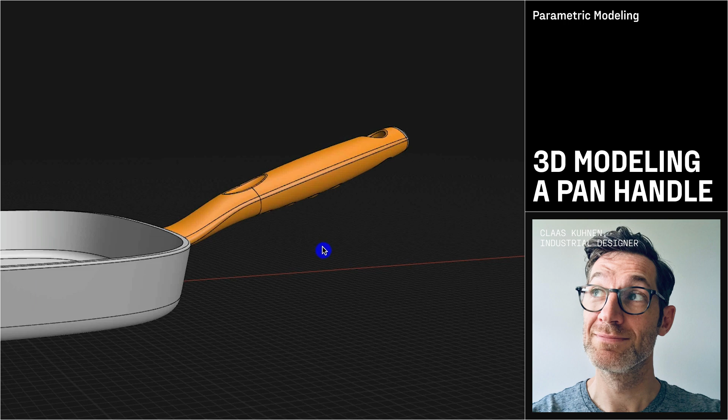Hello everybody and welcome to this tutorial in which I'm going to show you how with Shapr3D we can create this nice looking frying pan handle and attach it to an existing frying pan. We will go over the creation of the individual sketches and then the bodies.

We will touch the history, how we can design and modify our handle styling, and then we will finish everything with a nice product presentation inside the visualization mode. And with all that said, let's get going.

Here's actually now our raw demo file. As you can see, we have an existing basic frying pan model already inside our design.

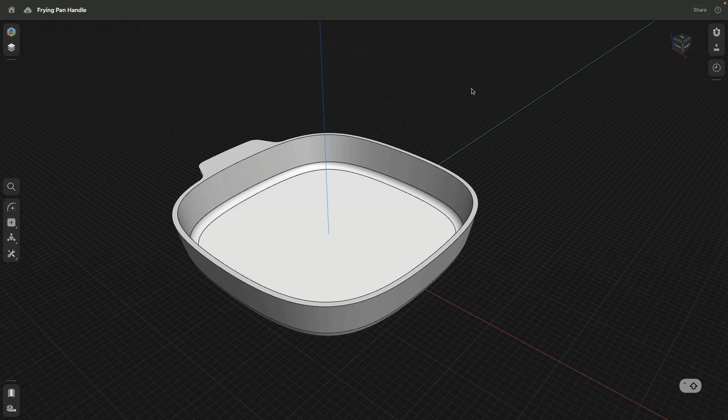All the snapping options are turned on and we are in millimeters. The easiest way now to start designing our handle is first thinking about where is the handle going to be attached to the frying pan, and then from there we grow the handle out. To do this, first I will add a construction plane. And I will offset this plane by 110 millimeters.

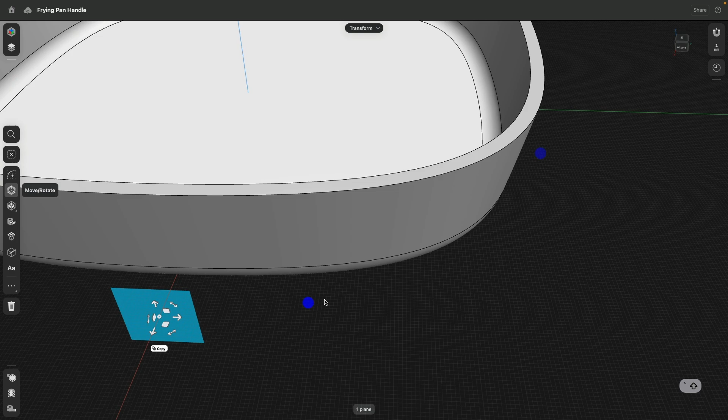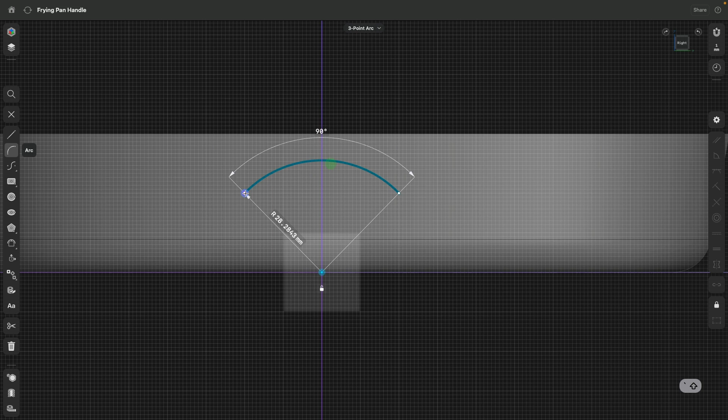This is actually very useful because now, right where this construction plane is, I can create a new sketch. In general, I always create very clean geometry, so no details such as fillets. All that, like fillets, I will add later. So with the arc command, I will create an arc here. I will create an arc at the bottom.

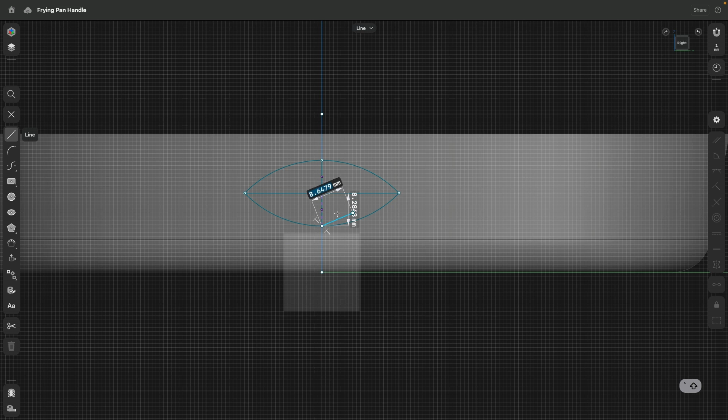Then, because I need tools to also control where the arc is and the dimensions, I create a horizontal line, escape. I create a top line, escape. I create a bottom line and I press escape. And one more time escape. Now these three lines I can select, turn into construction lines, because they're just guidelines, and make sure they're horizontally and vertically oriented.

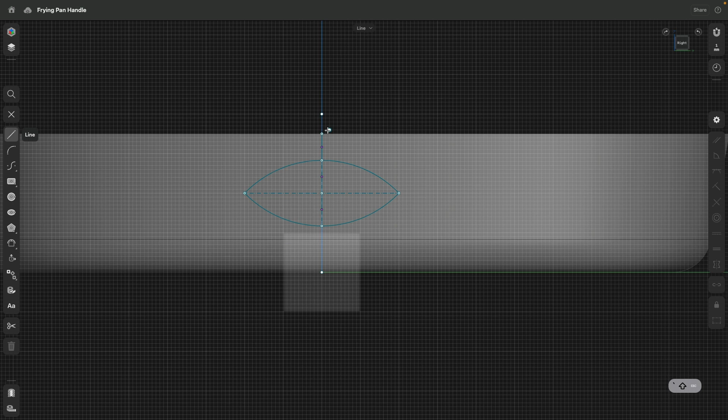Another line on top, and escape, and escape. And the top point I lock, and then this line here again, I make a construction. Because this now gives me the possibility to very precisely position the height of this arc.

The width of this resulting body I set to 40 millimeters, and then the height I will set to 10 millimeters. But you see the two ellipses are very uneven. But when I select both arcs, we can set them to equal. And now they're perfect. Very good.

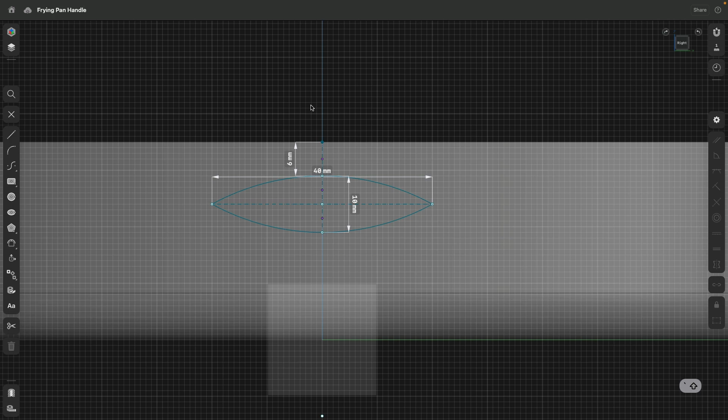Then if I zoom out, exit the sketch, I can now select the filling of the sketch. So you see the dashed construction lines don't interfere with our modeling, and I can extrude something in or out and cut it into the body. So you have to be careful where you move the mouse to.

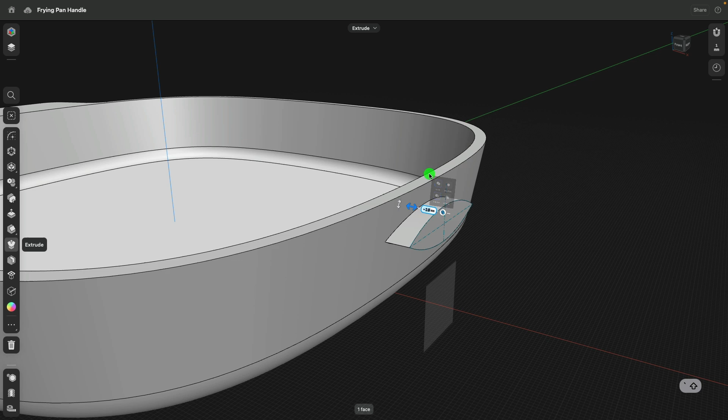And here in this case, I don't want to cut. I want to actually fuse it right into it. So I select the union command. And there you see, we only have one frying pan. Perfect. Here, I will put the two pieces into a folder so I can hide it. There we are.

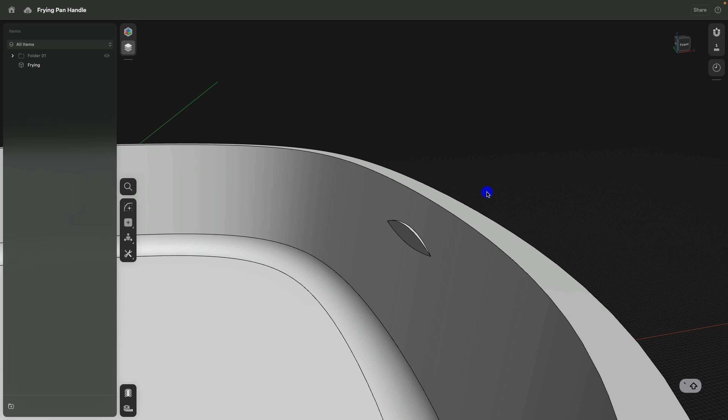In my case, as you can see here, I worked a little bit dirty, which is not really a big problem. Look at this. I simply go ahead and adjust the design. So -8 millimeters. There, perfect.

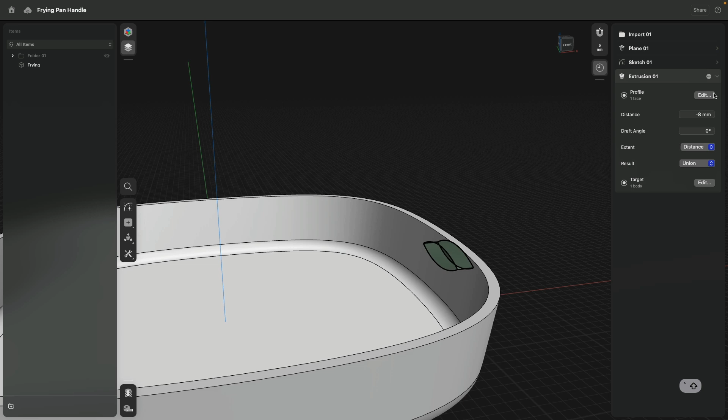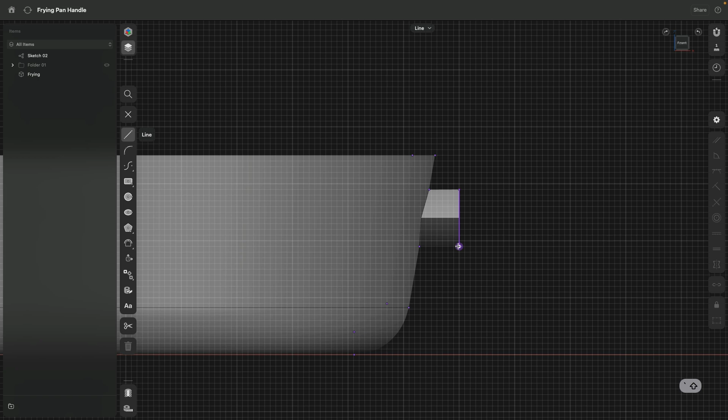Now we can think about how we do the handle. Because I have this body, I have a midpoint. I will go to the front view. I will create a new sketch. You see there now I have two plane intersections, so where the geometry intersects with the sketch, and I can just draw a vertical line between these 2 points.

And there's my midpoint. From there, I draw a line out, 175 millimeters. And click. Very good. And escape. And then I draw another line out. There and there. And escape. This line and this line, both will be horizontally, vertically aligned. And the angle between these 2 lines is 18 degrees.

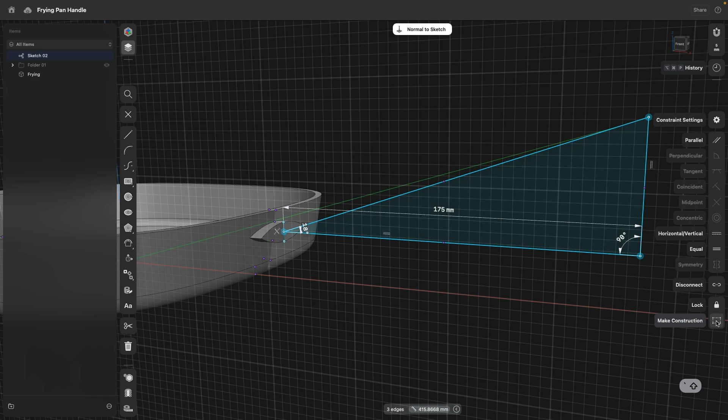And actually everything is just a construction, an underlay, if we want to think about it this way. So let's select them, make them a construction type. Perfect. Because now I have basically the point where the handle will start. Here we will have our curve, and then we will have the transition into the base.

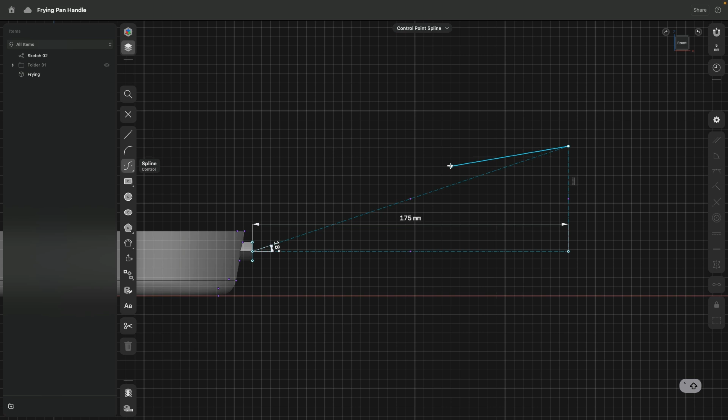Very nice. So we can now go ahead in the sketch to add our spline. I will use the control point version, and from there I will click and go over and click, and I press escape. The distance between these 2 points I would like to be 120.

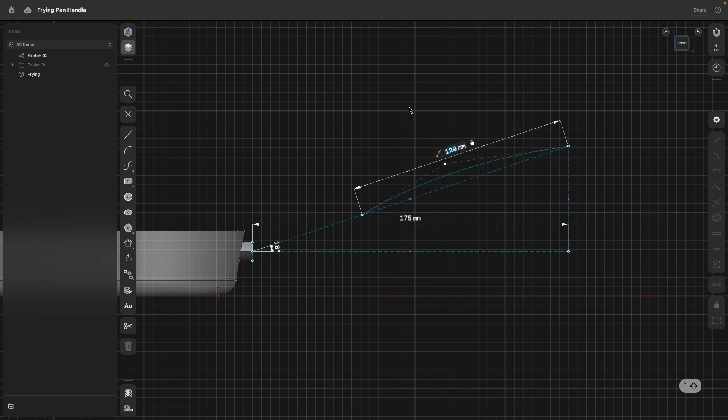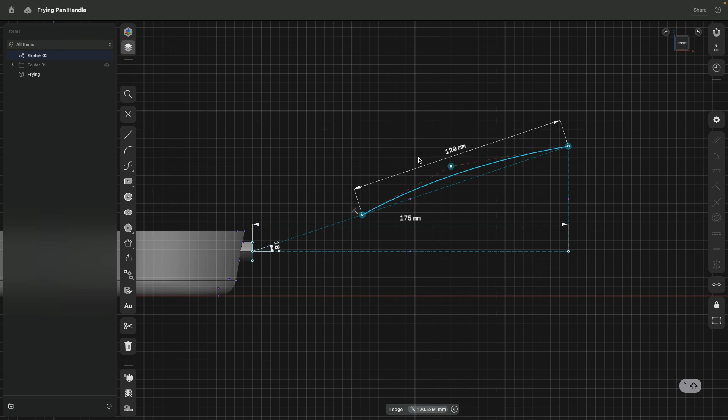There we are. And then this point I can move around, and with this you see we're arcing basically this handle quite nicely. Very good. So along this spline we are sweeping actually 3 profiles. And we'll do pretty much the same construction like we did for this shape.

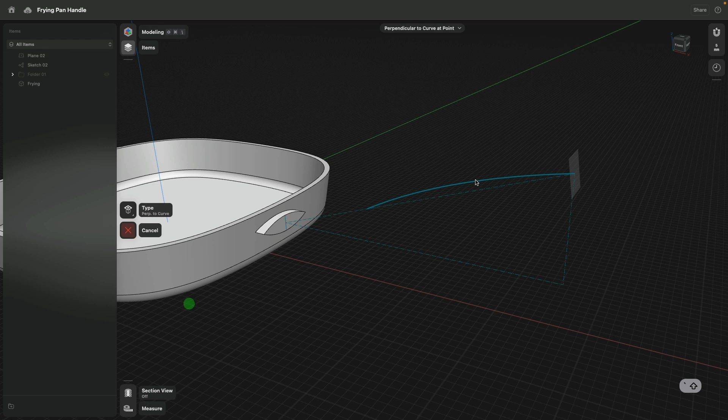So what we will do, we exit the sketch, then we go to add and construction plane. The type will be perpendicular to curve. Click on this one. Okay, at the beginning, that's fine. Then we do the same. This has now to be somewhat at the center, but a little bit further. Okay. And then we do one last at the end. And click and drag this to the end. Perfect. And done.

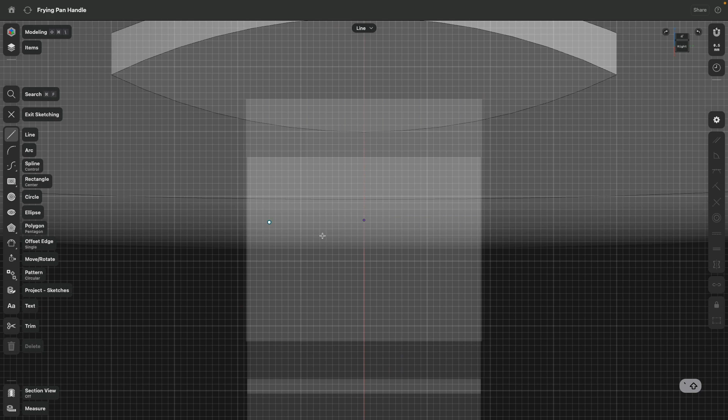Very nice. So on each of these construction planes, now we can place a sketch. We will start with the first one. So here I will create a sketch. We have actually where this new sketch intersects with the previous sketch, the plane intersection point. And all I need to do now is I need to have my arc, top and bottom, and then my left and right and top and bottom elements.

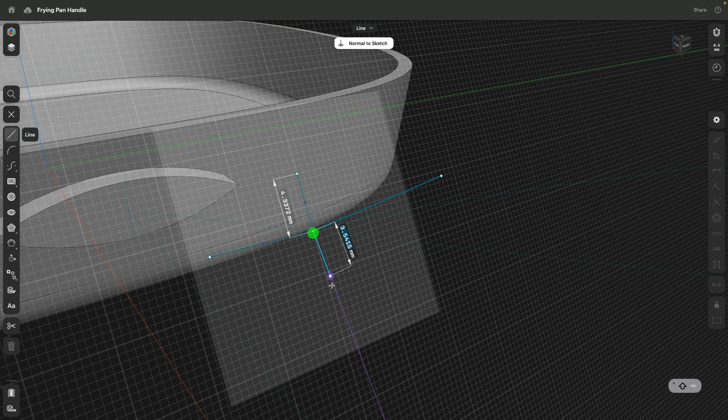Because now we have this center point, I will do a very quick sketch like this. So you see how I go up and down, left and right, then escape, and I select all these lines, horizontal, vertical. These 2 will be equal. And then also these lines all will be construction lines.

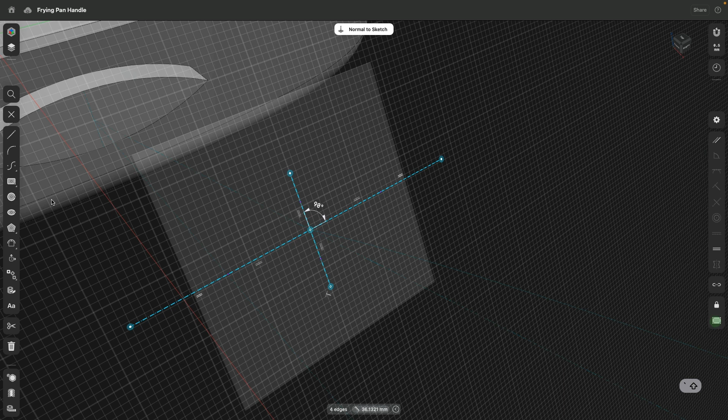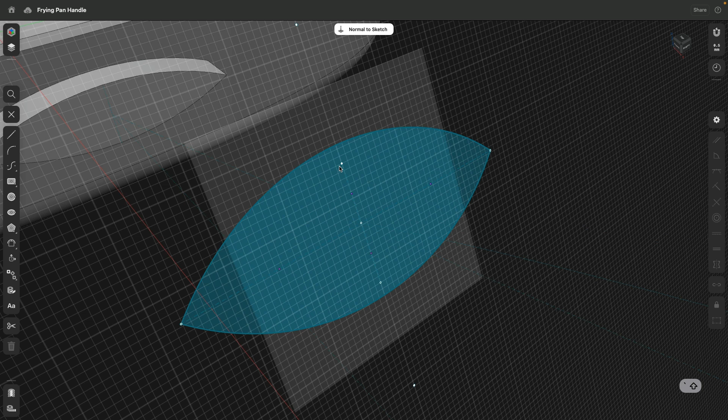Then I can add an arc on the top and an arc at the bottom. There. I actually have one extra arc, which I need to delete, and there, reconnected. Beautiful. Then these loose ends, actually, I drag onto the arcs. There we are. In case there are any foreign constraints, you can select them and delete them.

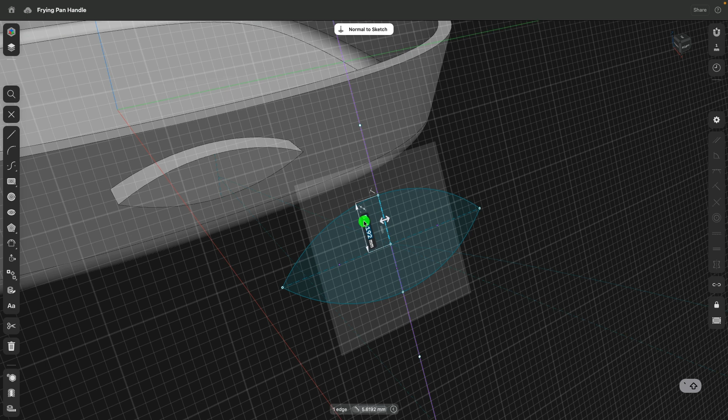Beautiful. So now we can specify that this should be 8 millimeters. This should be 13 millimeters. And then this will be 14 millimeters. And you see that actually with this, we created a nice kind of like cross section. The sketch is done. Let's go to the next sketch.

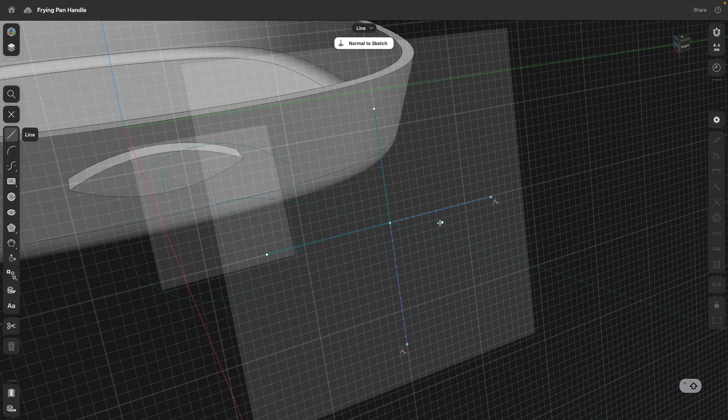This will be a little bit wider, but the process will essentially be exactly the same. So one line, one line, one line, one line, and every time I draw it, and after I drew it, I press the escape button. Here, everything horizontal and vertical. These two will be equal. Very good. This also will be 8 millimeters because this will be the same on the top.

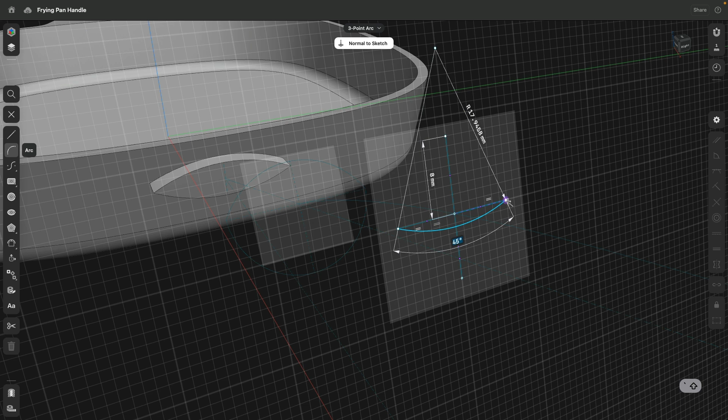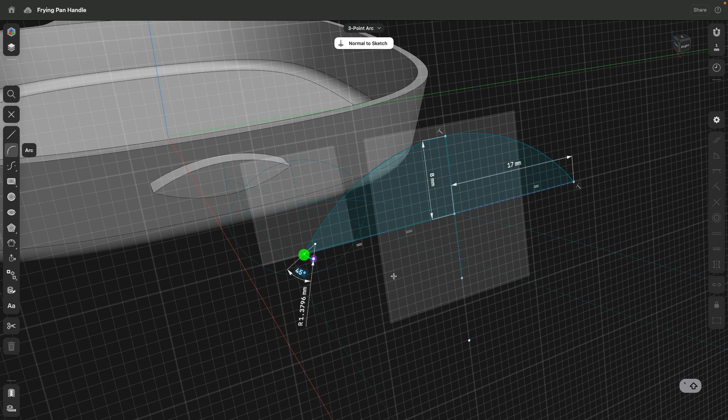But I just realized I should actually first draw the arc. Then I can snap actually the line onto the arc, and then I dimension the line. There. This will be 17. And then this goes down, and this point, there's a constraint which I will remove and attach it. There we are. Beautiful. And then this line will be 16.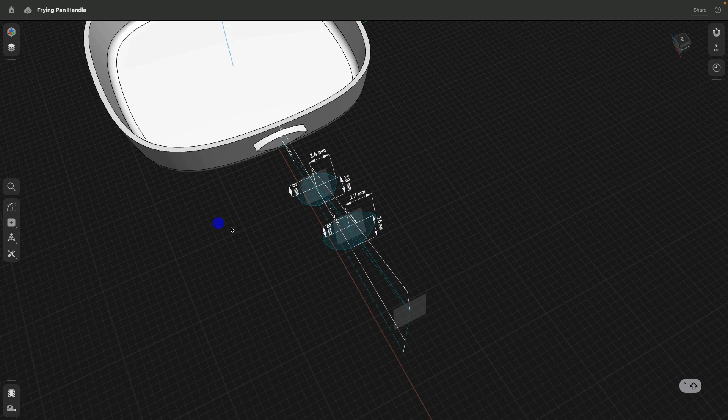So if we exit the sketch, click somewhere outside, you start seeing that this gets a little bit wider and also deeper. And that is really what is important. Now we can go to the last sketch. There we are. Here again, same thing, escape, draw, draw and escape, draw and escape. I saw here's an endpoint constraint, which I remove.

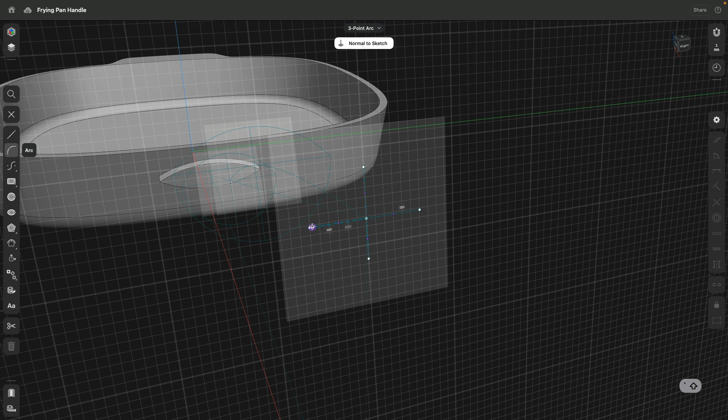Then we select all these lines and horizontal, vertical, and construction. These two will be the same. And then two arcs. Hold on, and just make this a little bit less perfect there. And we drag this onto it. There's the line. Okay, very good.

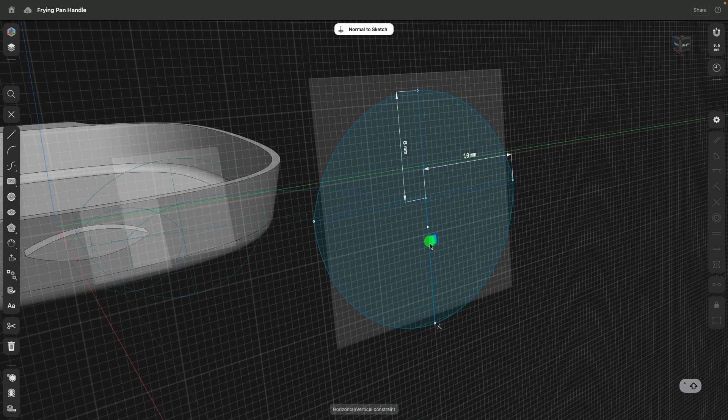This one here, again, will remain being 8. You notice that actually the height here along all sketches is the same. So kind of like the back of the surface or the top surface always has nearly the same. This will be 10. And this I will set to 10 too. So we'll make this a little bit slightly round. Yeah. So it's nice fitting into your palm where your pinky is.

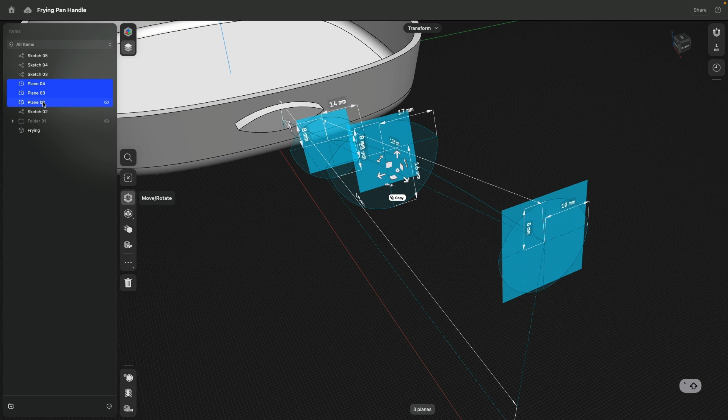Beautiful. We can see that, for example, these construction planes are a little bit in our way. So I put this actually into this other folder. So they are gone. And now I can select actually my sketches. You see here, I have only an element of my sketch selectable.

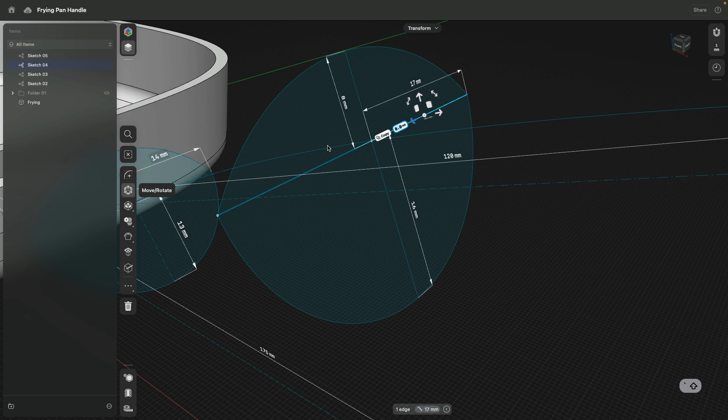So this means that in this case here, if I go into editing the sketch, these lines, I actually forgot to make a construction line. So sorry for this hiccup. 1, 2, and 3. And here comes now the thing.

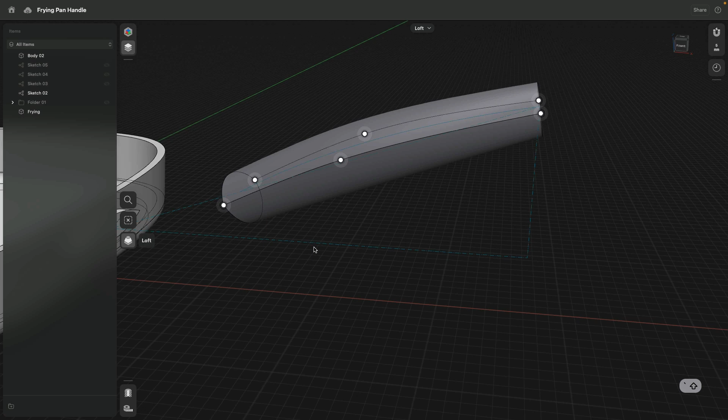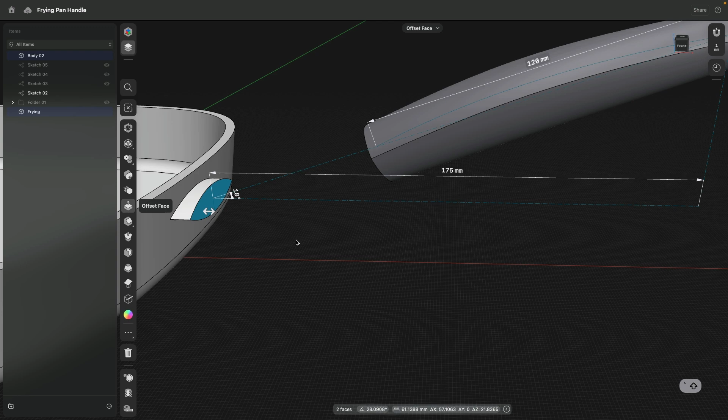We can loft those. Beautiful. See, the center spline is really helping us only to position the profiles and rotating them correctly. And then we simply loft between the first, second, and third one. Very easy. Since we're at this point, let's actually make a loft between the base and the handle.

There we are, loft. Then now we can go to history, go to the last loft command and say G1 and G1. And look how beautiful this transition is. Here, this is linear, this goes in, that is fine. This is part of the handle. So this I would like to be a G2. And this is actually a nicer, softer transition, but a little bit more computationally intensive.

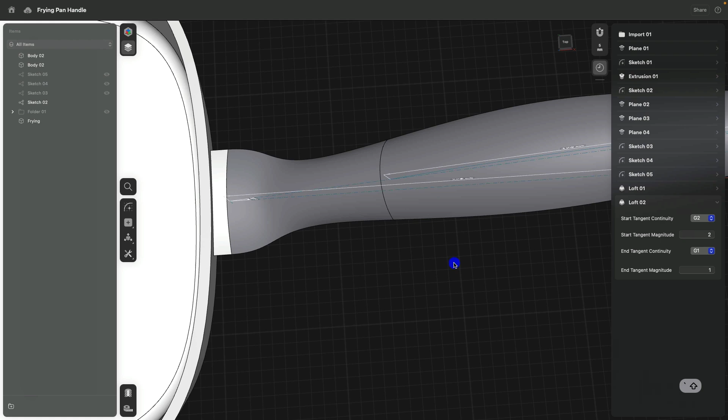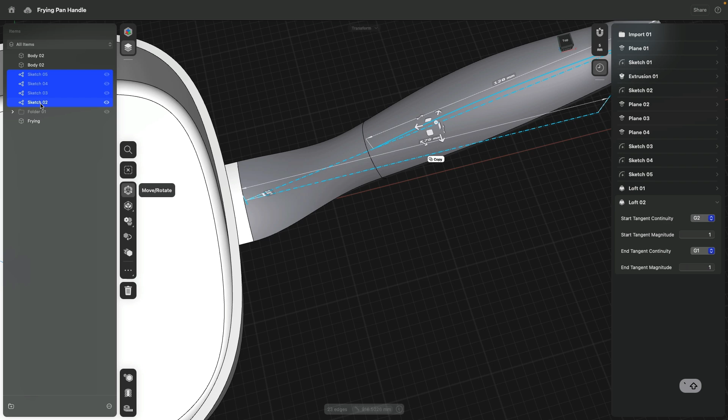We can also play with these values. So you can see how this is now further pushed down towards it. So this way we have an ability to style the transition a little bit, or we leave it at the default value, which will make this a nice uniform transition. I will select all these sketches, put this into that folder one more time, close this, go to the top view, and this looks actually really nice. This is good. Beautiful.

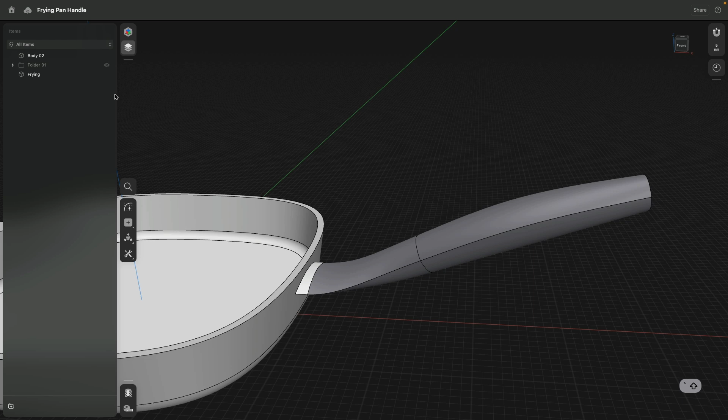So we have now the frying pan, we have one handle, we have the second handle. We can join both pieces together. So simply at this point now we have just one body to deal with. And I just move this one up. There we are. Very nice. Cool. Beautiful.

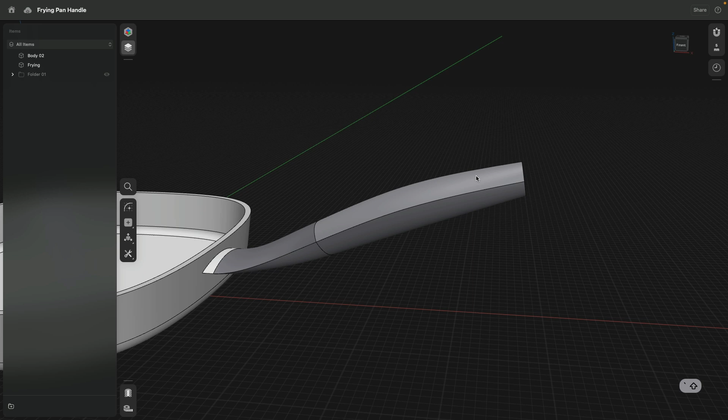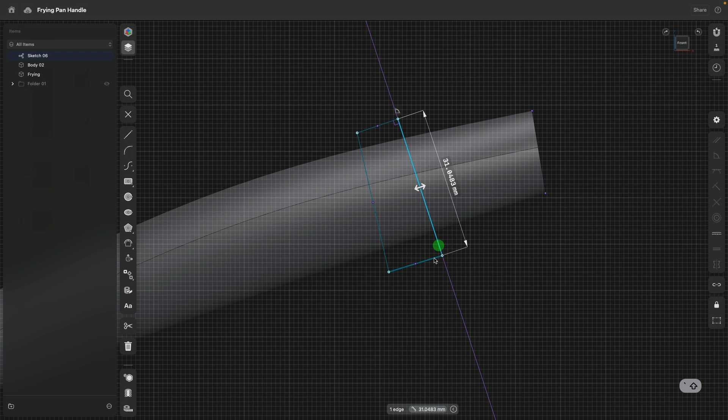The handle also needs to have a hole up here. Okay, so we can go to the side view, go to sketch, and then we draw another line. Now this line should not be at an angle. It should kind of like go perpendicular through that piece. Then I need 3 more lines. Here, these 2 will be perpendicular, these 2 will be perpendicular, and the last 2 will be perpendicular. So now, basically, as you can see, we have a nice rectangular shape.

This whole thing can be 10 millimeters. So we do a revolve, then now we have 20 millimeters of an opening, for a hook to go through. And if we want to rotate the sketch, we can select everything, go to rotate and just rotate it. When we turn the grid snapping, etc. off, then we can also have smoother rotation, or we just simply enter the value here.

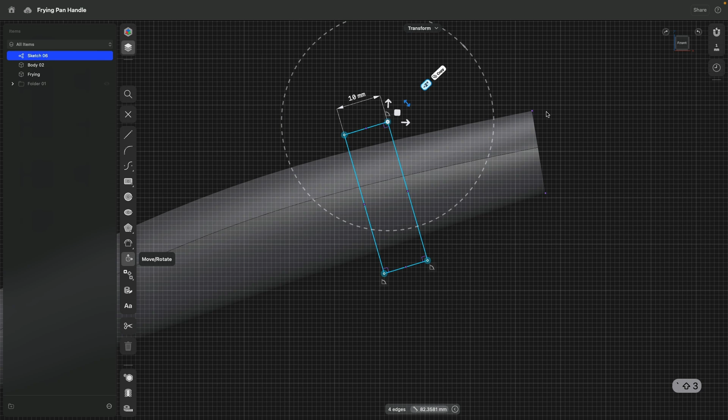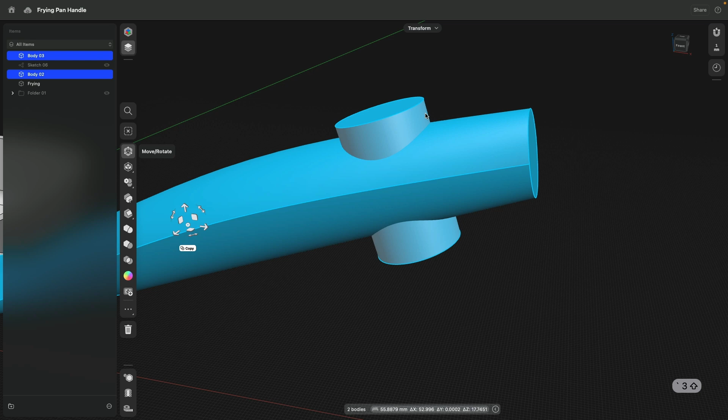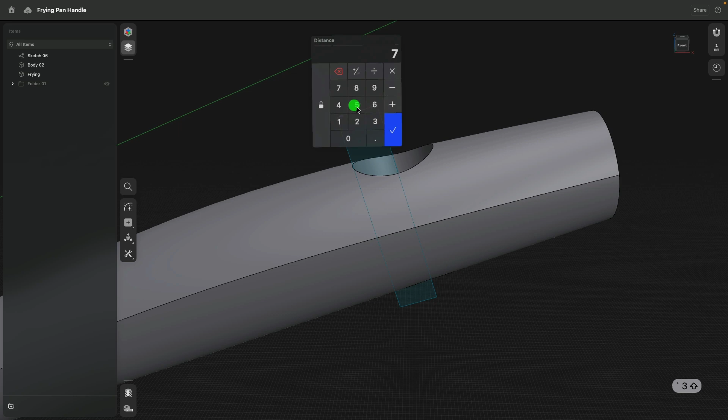There, beautiful. With this done, I can select the sketch profile, select this sketch edge, and then do a revolve. And with this revolve body, now I can select my handle, double click the cylinder and say subtract. Keep none, perfect. So there we have a nice big opening. If this is maybe a little bit too big, we can adjust the sketch. There, you see now this is smaller. We don't have to go into the sketch; you can see that the dimension we added can be edited while being outside the sketch, which is really nice.

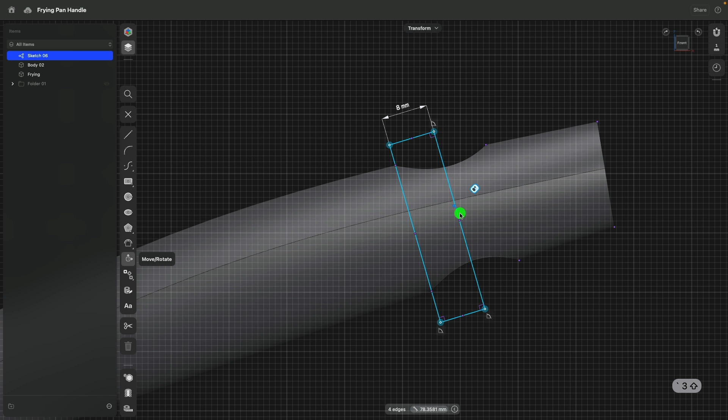But maybe I want to change where this is a little bit. So with this being now in the sketch editing mode, I can select everything and move this around. Oh, look how beautiful this is. -2 and enter. Very good. This looks really, really nice. Okay, I move the sketch away. There we are. Perfect.

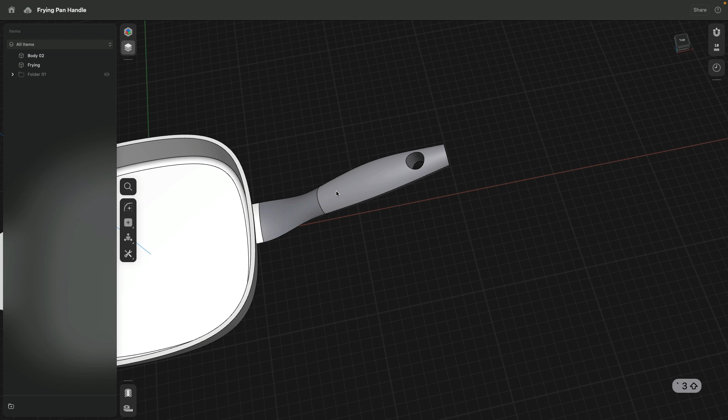To style this handle a little bit more, I might want to have something for my thumb to go into, kind of like a groove, and something to stick out down here. That's actually also a very interesting exercise. There are many ways how you can do this. I simply, in this case, work more freely in a sculptural approach.

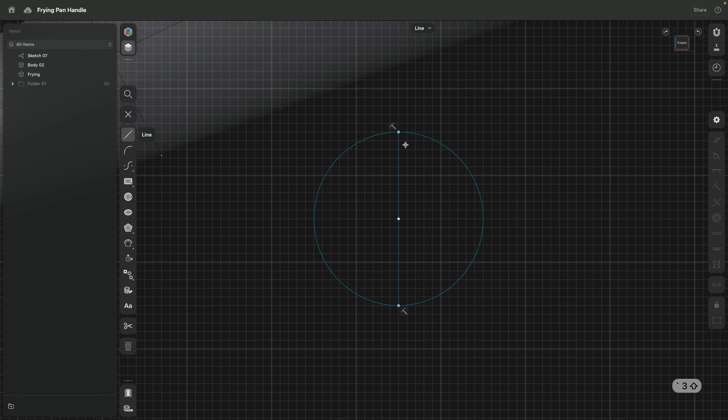So I will create another sketch and make myself a circle, 20 millimeters. There we are. And then here I will draw a line right through the center, along the grid. Because of this, what I can do now is make a revolve. There we are. And this body I can select and move into here. Look at this. That looks nice. Number 1, copy.

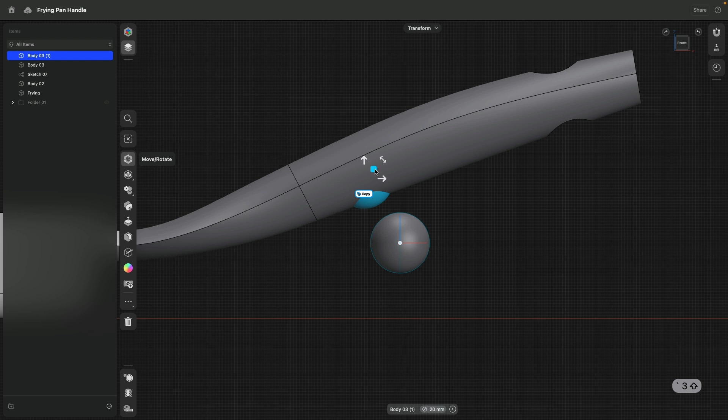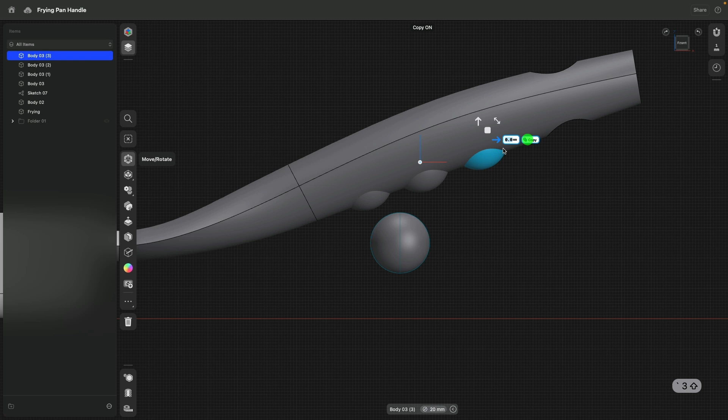There. Okay. Then select, copy to here. Click, click, copy to there. You see how I'm making these 3 nice copies. I have 1, 2, 3, 4 positions now, for example, for my fingers to go in between. And the last one I will actually bring to here.

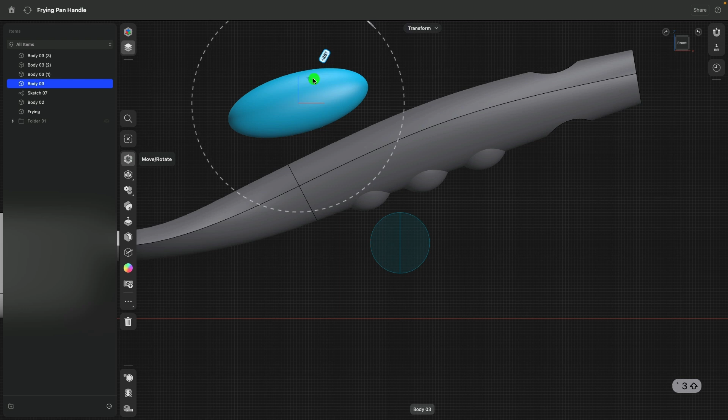And what I will do now is go to scale, and we are in scale non-uniform. I turn this into an ellipse. And then I will rotate this and sink this into the body. There we are. Beautiful.

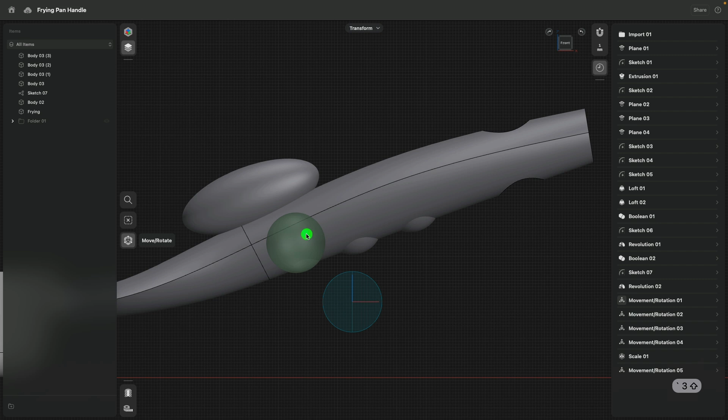And the construction timeline is going to record everything, so it's actually really nice. So if we want to position something, we can simply click onto that point and move it. You see all the other elements, because they were copies from the first sphere, follow, which actually is really nice. It's kind of like a product array there.

And then we have that one. And maybe here now, let's add a last one there. Perfect. So this is here. I can move this one up in the timeline to change also the order. And this is movement 5.

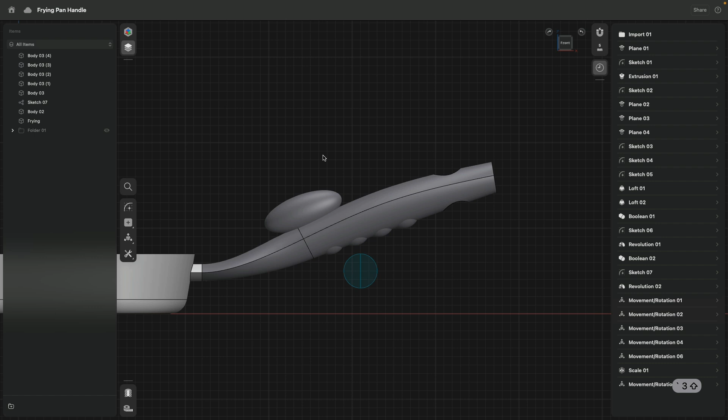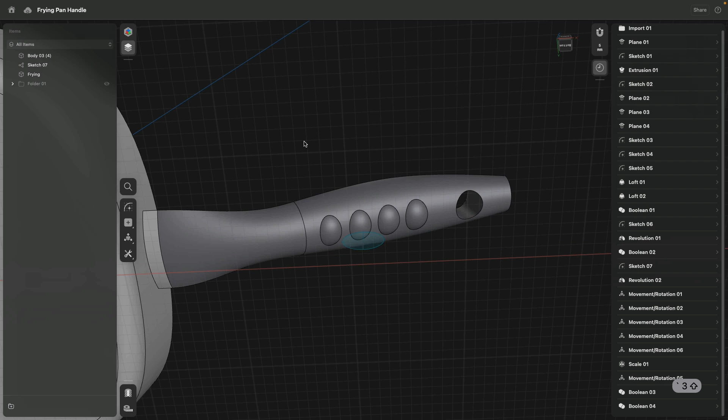There. Very good. Now, with all this done, I can select the handle, select the elliptical shape, and say subtract. So there's this piece cut out. I can select my handle, shift click all the other spheres and say union. Perfect. And you see, this is actually really very easy.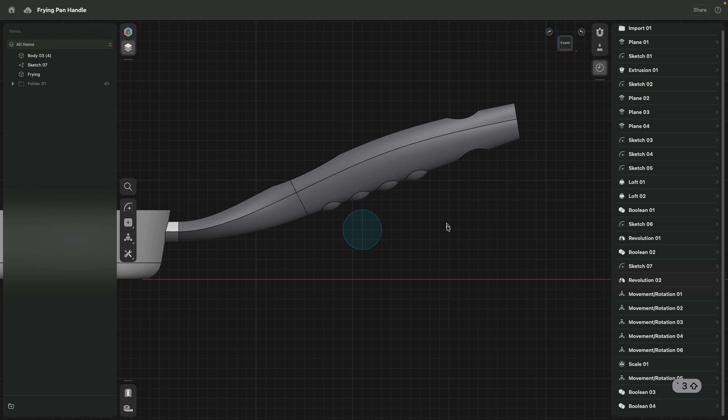Just one simple sphere, and then we move the bodies around into the position and do our solid calculations. You could obviously also sketch everything if you want to. It's more labor intensive, less intuitive. Beautiful. Okay. So I would say that at this point, this handle reached a position where we can now start thinking about final touch-ups, rounding edges, material studies, maybe a metallic cap.

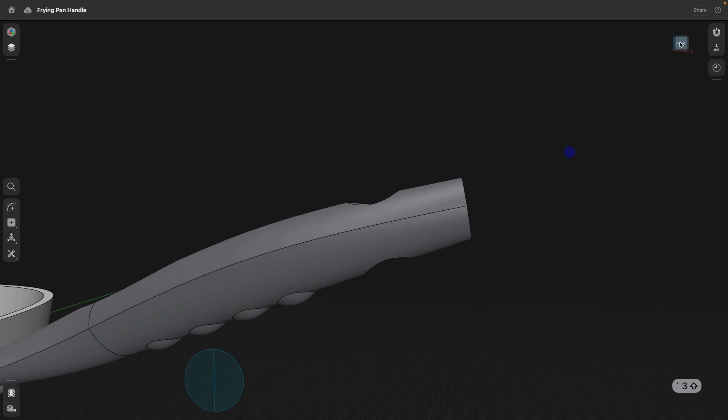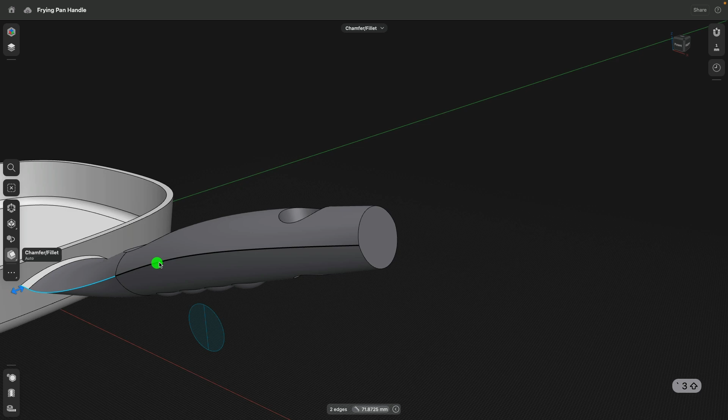If I go to the side view, this face, if I select it and go to rotate, I can rotate. You see, that's actually quite nice. So slightly angled. We have here all these edges. This is now something we can talk about.

So I will select all these edges and just add a fillet to it. And you see it does it actually for all at the same time. This is really nice. Then it makes sense to fillet the connection of the base to the frying pan. Then it makes sense to think about how I'm going to do actually the end. Now this will be the metal cap.

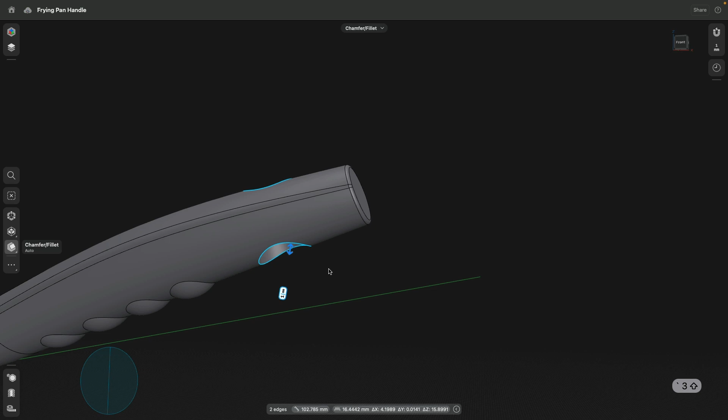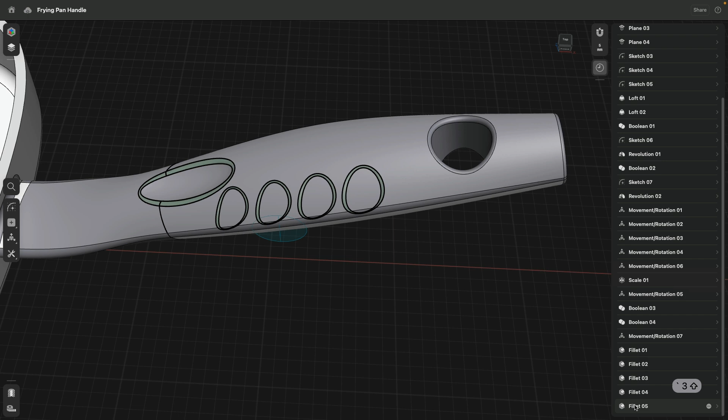1 millimeter for this edge. And then here, these 3, 4, and 5 edges, 2 millimeters, and round those. So here I have 5 edges rounded at once. If I go to the history, there you see now all the individual features and what they do. This works really good.

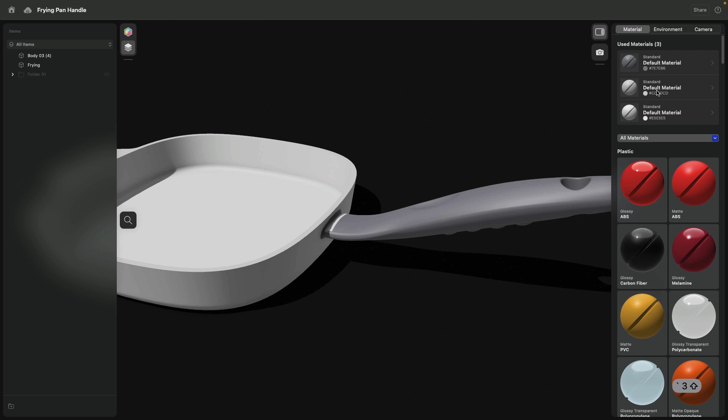Beautiful. One last sorting, and we are ready to put everything into our visualization environment. We have the frying pan, and we have actually the handle. We can see here there are different types of materials. So the frying pan, we have the outside and we have the inside. We do have actually some sharp edges. I just realized I forgot to do this, so please excuse me for my oversight.

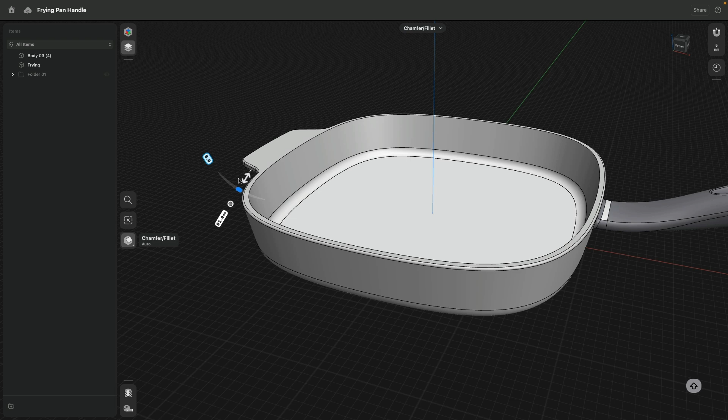This can be a really sharp edge, 0.25. And to make the touch experience of this design nicer, these outer edges I round way more aggressively. Very good. So let's go back to the visualization environment. I can go to metal and then I will scroll down to the steel material. There we are, the brushed one, and simply drag this onto the frying pan.

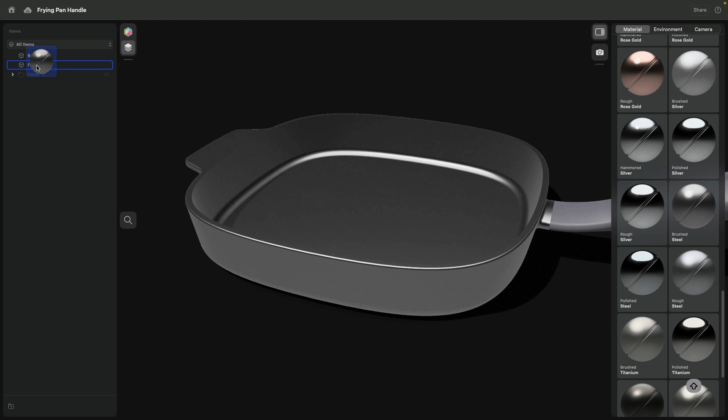You see, if I go to individual elements here, I get various faces. If I go directly to the body, then it selects the complete body. Then I can select the inside faces. Click change, and then here, when we go back to metal, I will look for the cast iron material. There we are. Very nice. Cool. Okay.

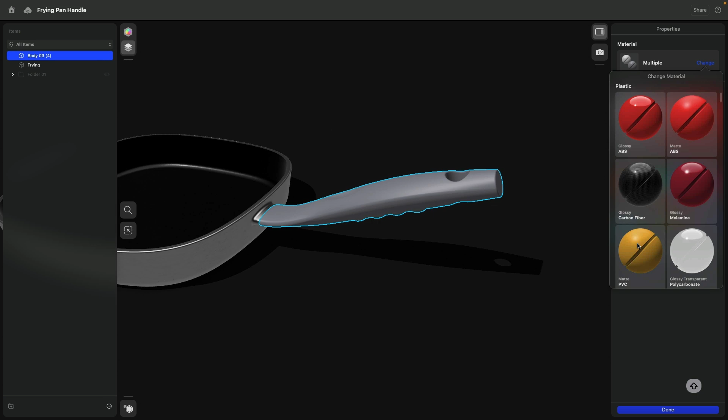For the handle now, which is in this case here, Body 03, I can select the body. It tells me there are multiple materials being selected. I simply click change and scroll down. PVC, that looks good. Select it. Then we can specify the material.

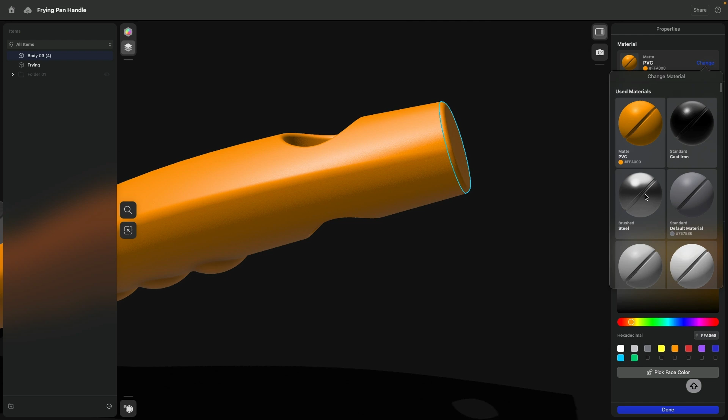There we are. Beautiful. We would like to have the end here to be nicely polished, or maybe some sort of a metal cap. So here I can select just these faces, as you saw, click on change, and then select the brushed steel material again.

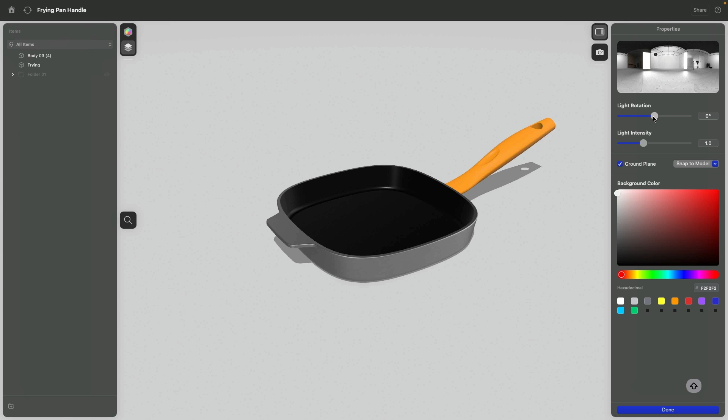To make this whole product presentation visually more interesting, let's go to environment. I will select gradient mood again. A nice brighter material is very good to support actually the look. You can click on the cog icon, rotate the light for the reflection, but it seems in this case actually to be perfect when the light is right on top. Lower the interface elements, and we are ready to create nice looking presentation photos of our product design.

And that's it. I hope with this exercise you learned a little bit and that you enjoyed it.